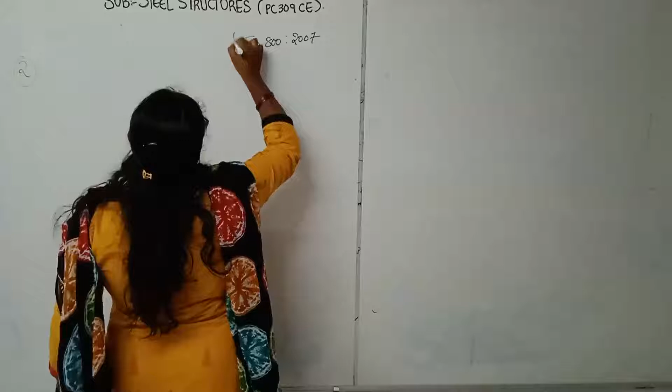Two plates, 12 mm and 20 mm thick, are to be joined by double cover butt joint to sustain a factored design load of 825 kilonewton.

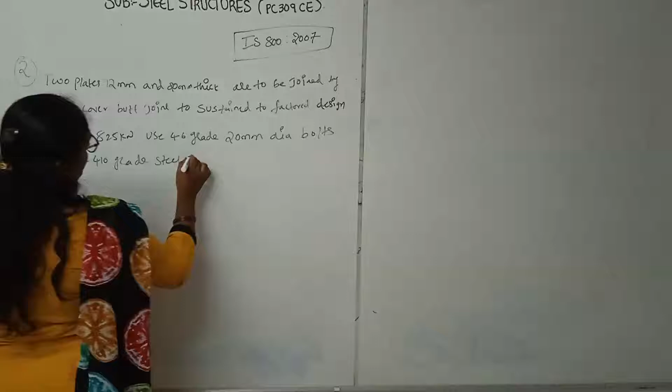Provide 8 mm thick cover plates, one on each side. Design double cover design butt joint.

So write what they have given here. What did they have given? Let's study this one.

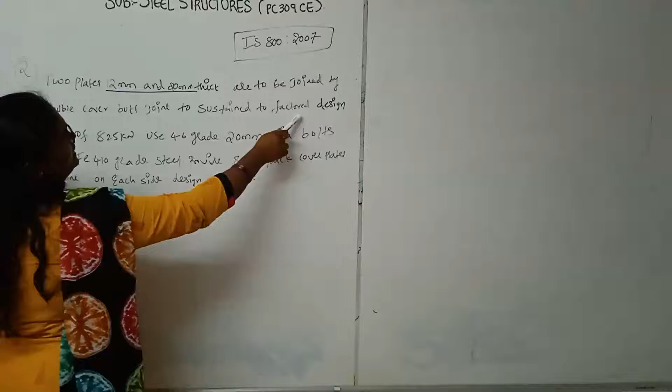Let's see here. Two plates 12 mm and 20 mm thick are to be joined by double cover butt joint to sustain a factored design load of 825 kilonewton. In the previous problem they gave a service load; here they have given the direct factored load.

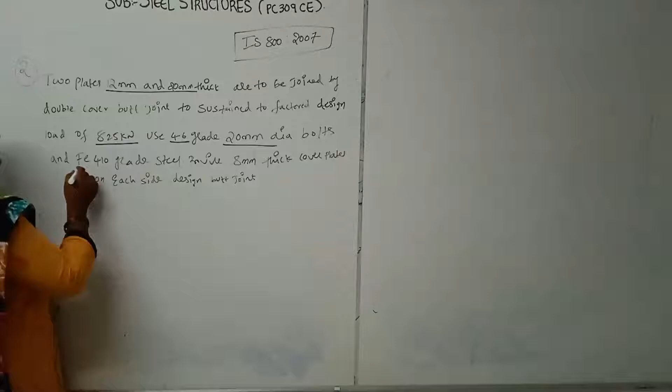This factored load has been multiplied using the factor of safety. Here they have given use 4.6 grade bolts of 20 mm dia, Fe 410 grade steel, and provide 8 mm thick cover plate.

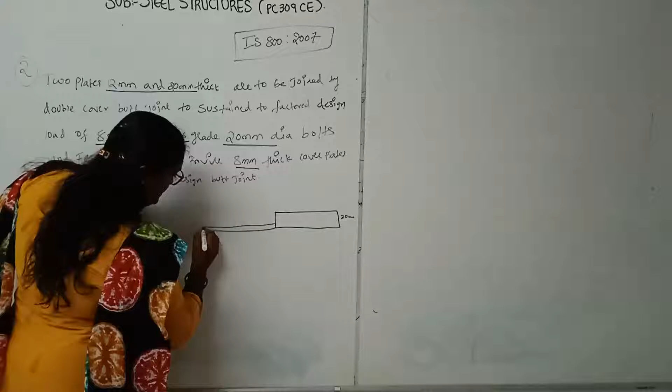So see here, this is your plate which is of how much thickness? 20 mm thick, right? Next here this is of 12 mm. This is of 12 mm.

So here what is it asking us to do? It's asking us to design the double cover butt joint.

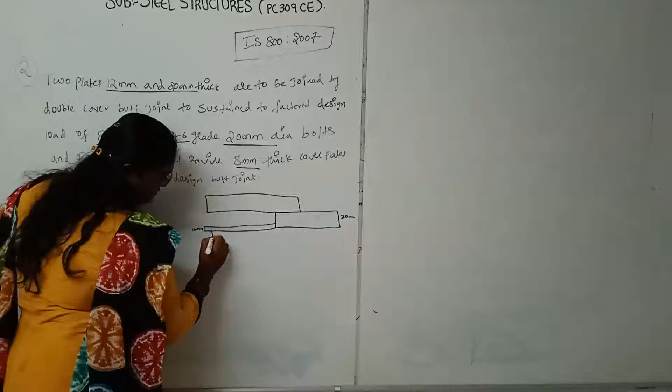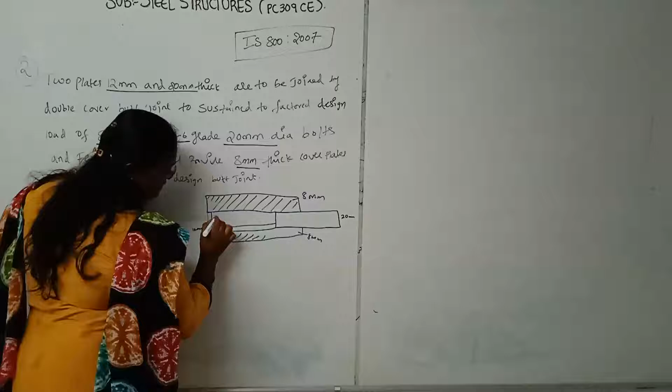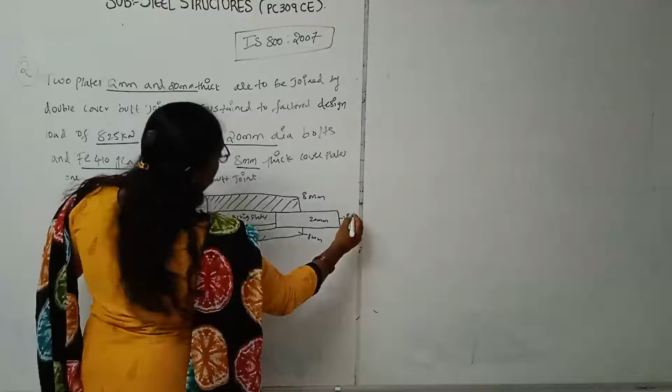This will be of 8 mm cover plates. Inside also you will be having 8 mm packing plates for covering this, right? This is 20 mm. Here you have 825 kilonewton load, right? I hope everyone understood.

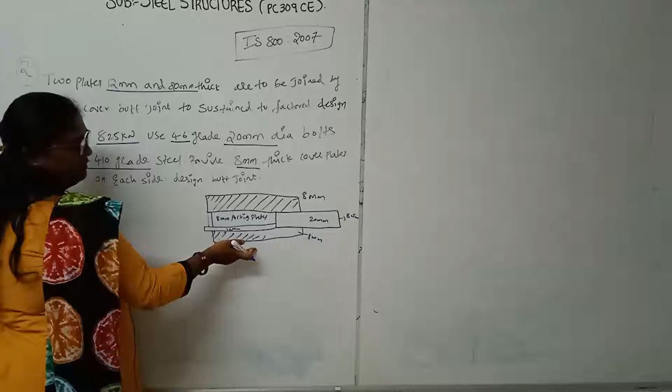This is 8 mm cover plate, this is 8 mm cover plate. Here we are using double cover butt joint, for that we have taken 8 mm cover plate on each side. Inside, for covering this, we are also using 8 mm packing plates. I hope everyone understood this.

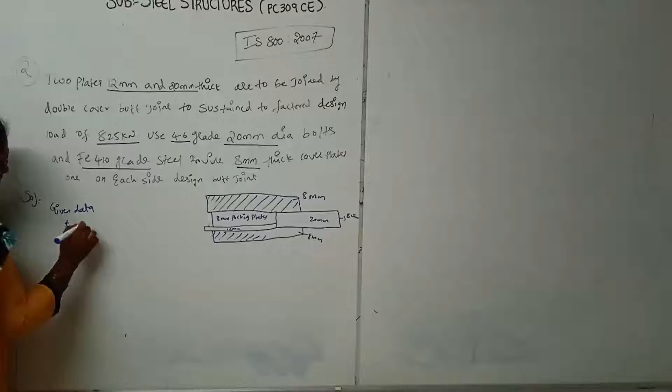So right now we'll solve the problem. What is the given data here? T1 is equal to 12 mm, T2 is equal to 20 mm thick. Here Pu is equal to 825 kilonewton, right?

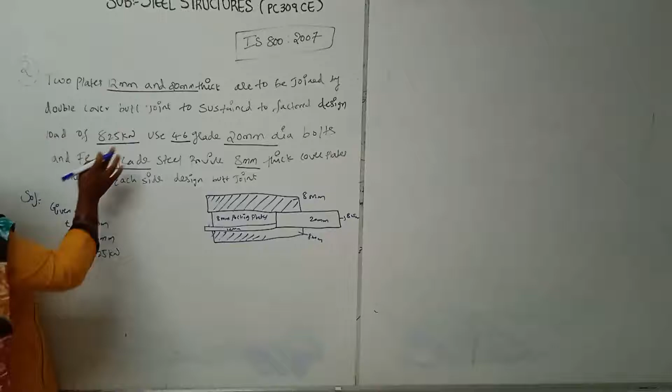Next, a joint, double cover butt joint, to sustain a factored design load of 825 kilonewton, using 4.6 grade bolts.

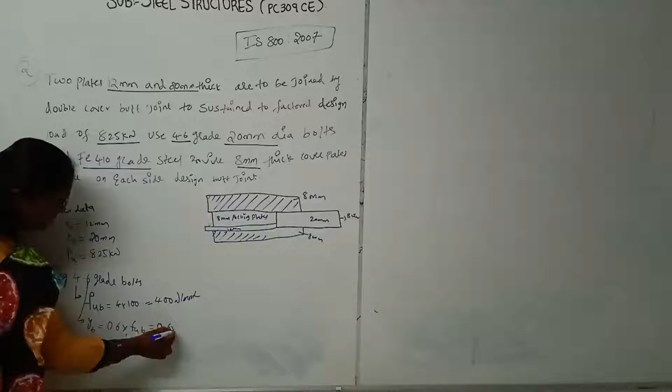So here what is your 4? That will be your ultimate tensile strength of the bolt, FUB, equal to 4 into 100. So this will be 400 Newton per mm square. And what is your 6? That is the yield stress of the bolt, equal to 0.6 into FUB. So 0.6 into 400 gives 240 Newton per mm square, right?

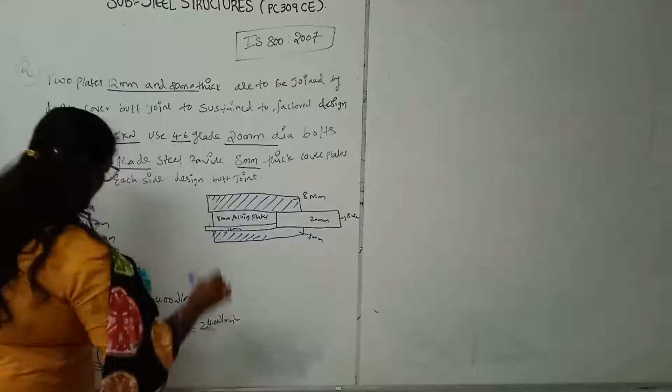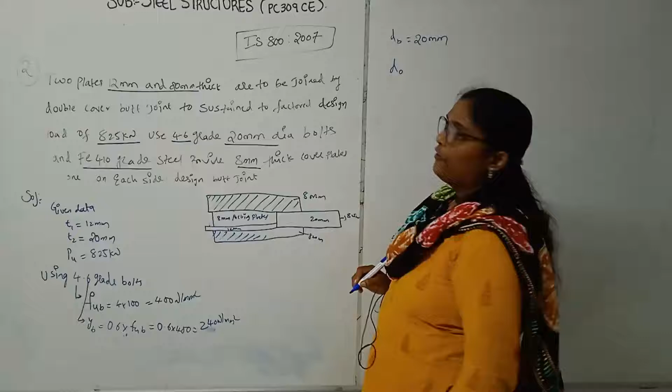Next, here what we are using, your dia of bolt is how much? Your dia of bolt is 20 mm. So what is the dia of hole? That will be dia of bolt plus clearance.

So here what is the dia of the bolt? That is 20 mm. So according to our page number 73, what is the value of clearance provided for the 20 mm bolt? That is 2 mm clearance. So that will be 20 mm plus 2 mm, 22 mm. Your D naught will be 22 mm.

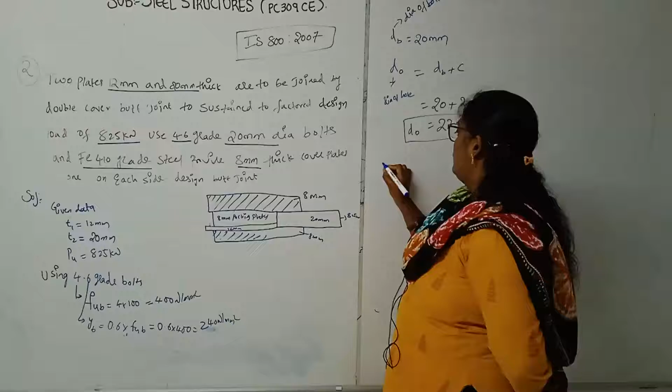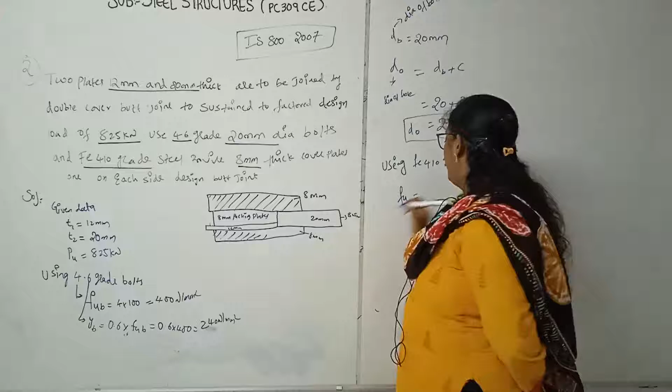So next, using Fe 410 grade steel. So what is Fe 410 grade? Here Fu, the ultimate tensile strength of the plate, is 410 Newton per mm square, and your yield stress of steel is how much? 250 Newton per mm square.

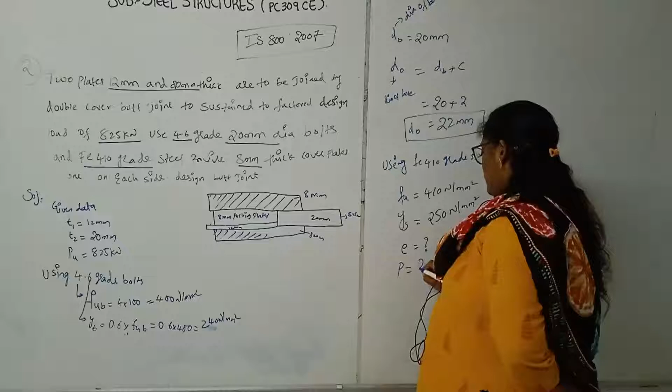Next we need to calculate here for going for the design purpose. What we have to find out? He is asking, we need to find out end distance, pitch distance. So how much? This we need to find out. Okay, we'll solve this one.

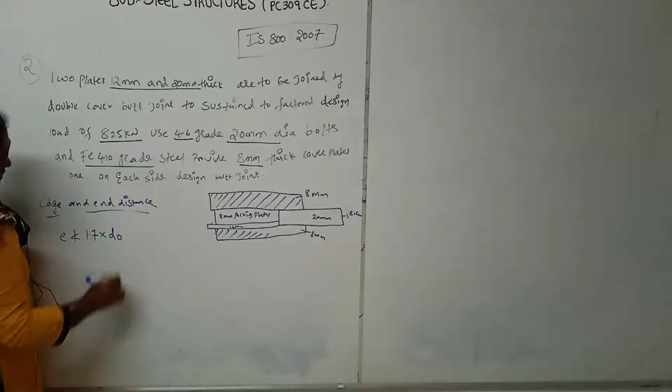So right, what will be your E? Previously we have taken this as machine cut. Now we are taking edge distance and end distance. So we have two criteria, E not less than 1.7 into D naught. Here we are assuming, in the previous problem we assumed machine cut, now I am assuming flame cut.

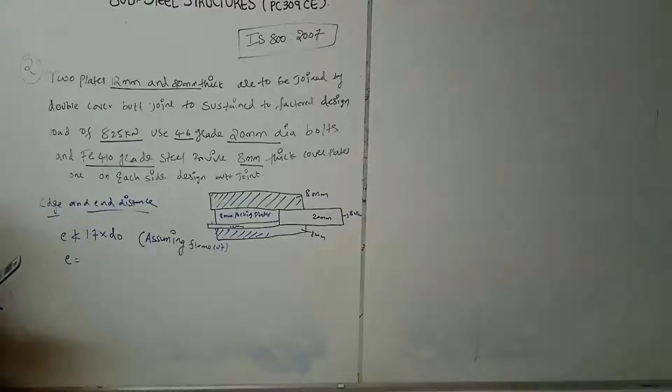So right, you have 1.5 D naught and 1.7 D naught. So here what will be the edge distance? 1.7 into D naught, that is 22, 20 plus 2 clearance. How much are you getting? 1.7 into 22 gives rise to E not less than 37.4 mm. So that can be approximately taken as 40 mm.

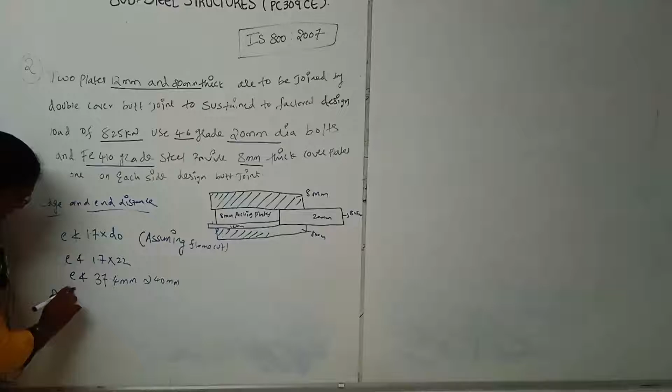Provide E is equal to 40 mm. So right, next we'll go for the pitch distance. Previously we have taken the minimum pitch distance and minimum edge distance. Now I am taking the value which can come between the minimum and maximum.

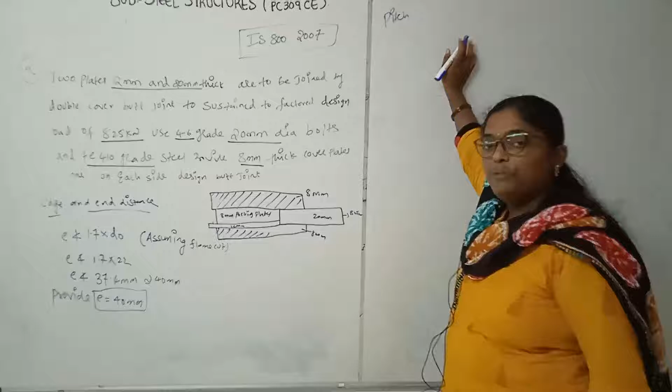Provide minimum pitch will be not less than 2.5 into dB, dia of the bolt. So P not less than 2.5 into 20. So what it will be? 2.5 into 20 gives 50. So P not less than 50 mm. This will be your minimum.

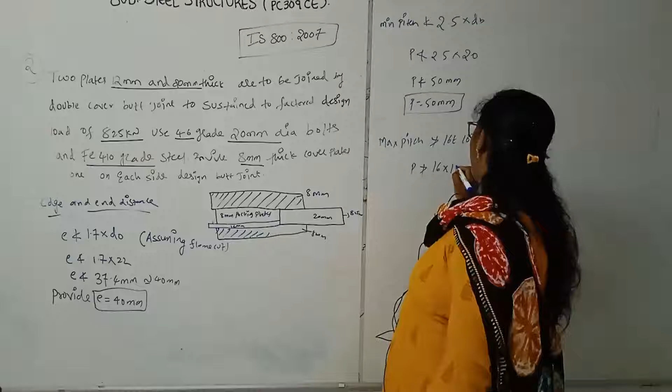So we will go for the maximum. Maximum pitch should not be greater than 16T or 200 mm. So here for P not greater than, I am taking 16 into 12, the first plate thickness. So right, P equal to 16 into 12, that is 192 mm, or 200 mm.

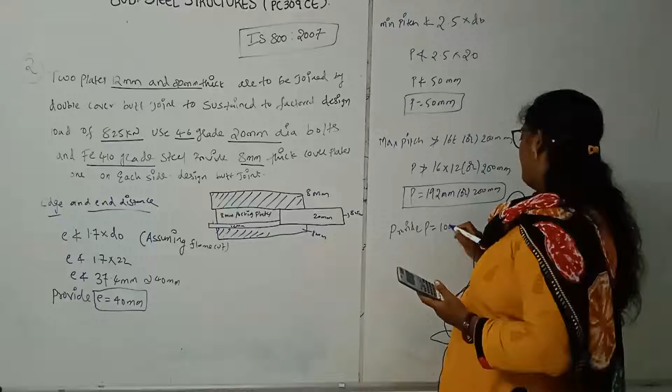So right, here provide P is equal to 100 mm center to center.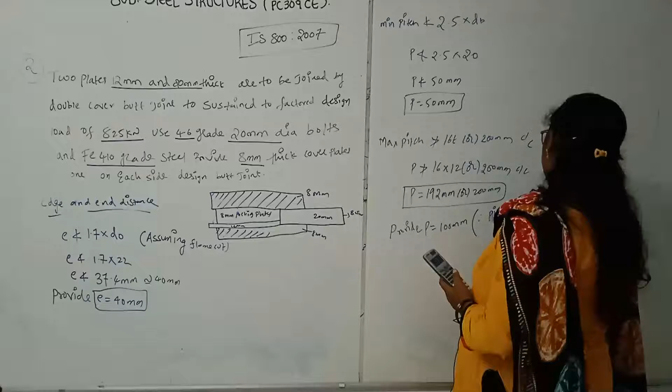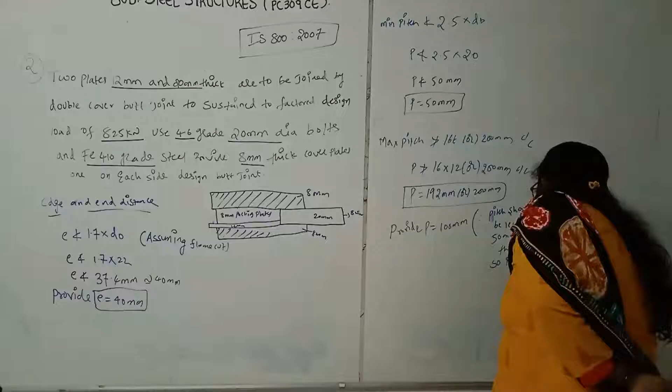Provide P equal to 100 mm. Here minimum, your pitch should not be less than 50 mm, and should not be greater than 192 mm. So provide 100 mm. Now we have got end distance and pitch distance.

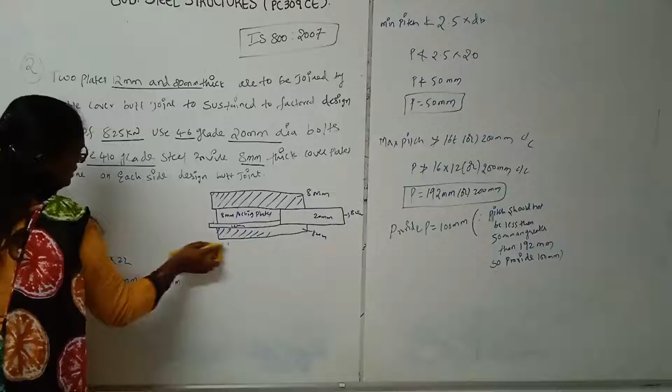Now we need to calculate the shearing and bearing. We need to design the double cover butt joint using shearing and bearing, so VDSB and VDPB. First, shear capacity of the bolt.

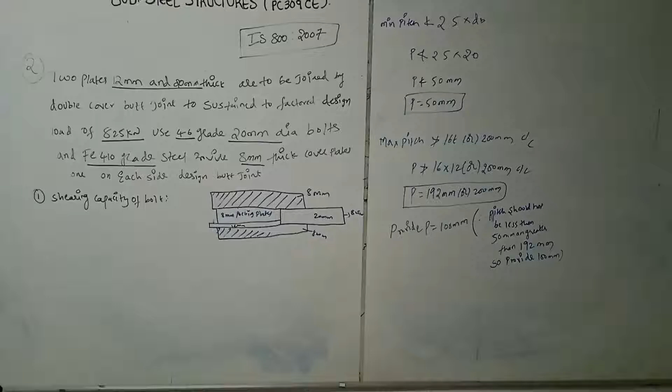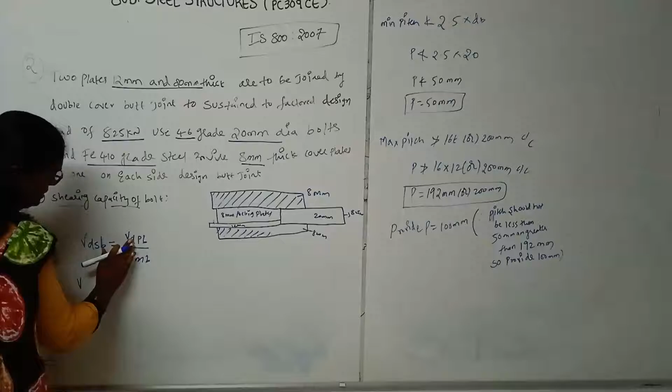Here VDSB equal to VNSB by gamma MB. So VNSB is FU by under root 3, into nn Anb plus ns Asb.

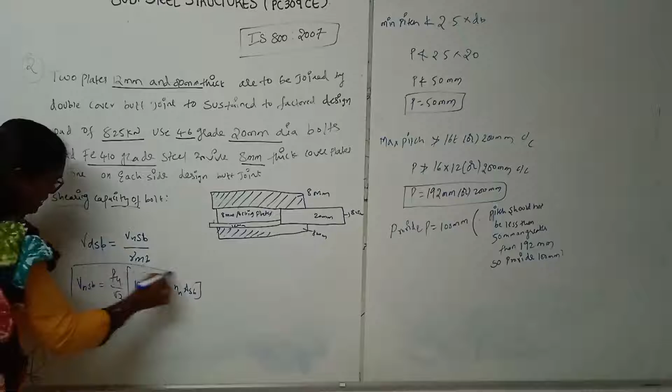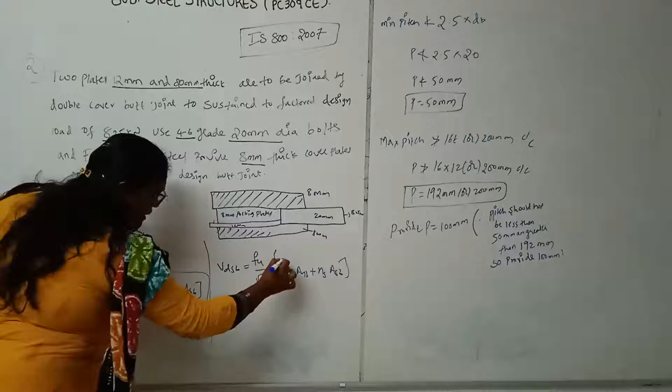So obviously your VDSB will be... Anb plus ns Asb. First we need to find out nn and ns. For the butt cover, whenever we go for the double cover butt joint, you will be getting nn and ns.

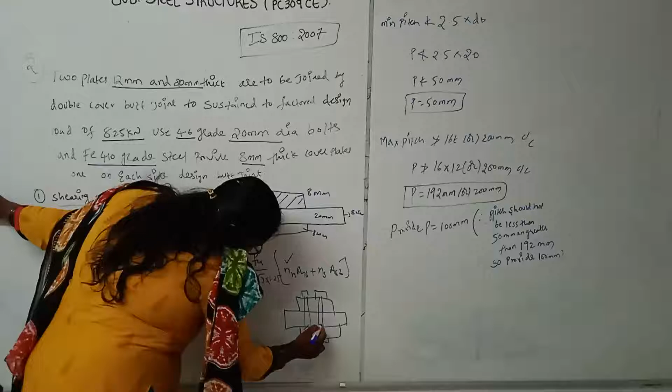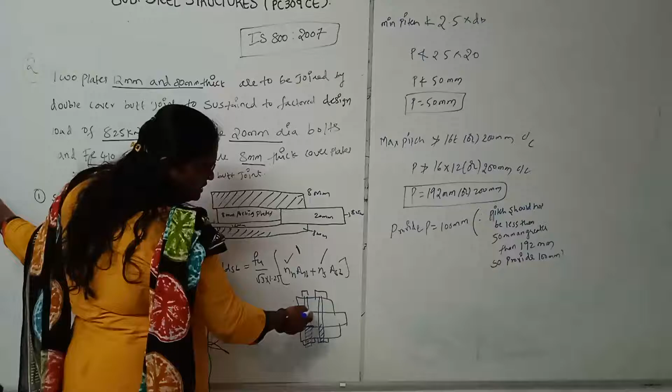What is nn? The number of shear planes at threaded portion. Here you will be having 2 shear planes — one shear plane passing through the threaded portion, so nn will be 1. Ns is number of shear planes at shank portion, which is also 1.

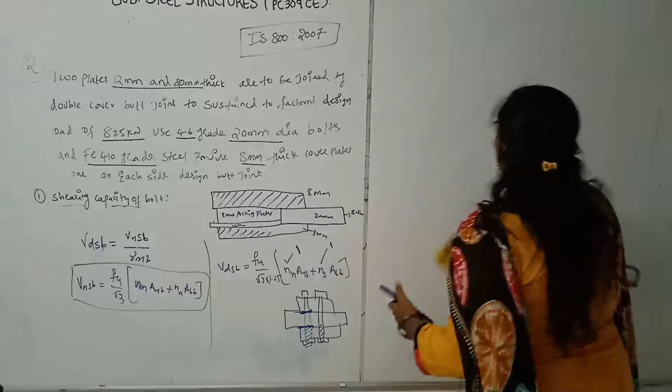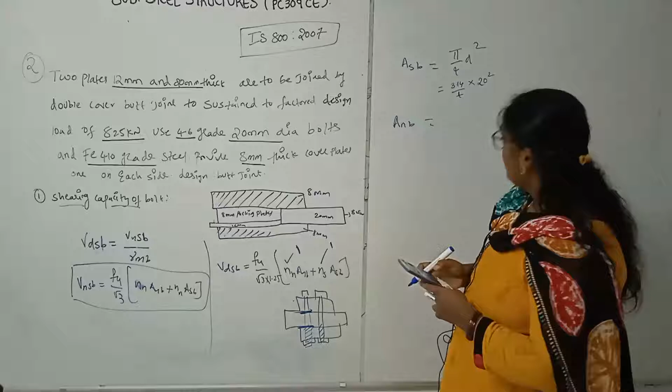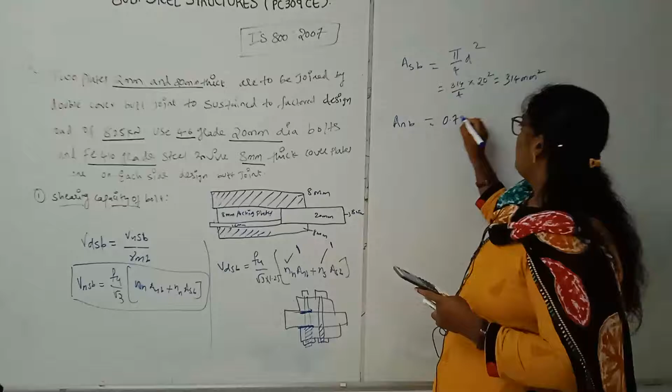So VDSB equal, first we will calculate Anb, Asb, and Anb. Asb here is pi by 4 d square, which is 3.14 by 4 into 20 square, giving 314 mm square. This is 0.78 into pi by 4 d square, or 0.78 into Asb, that will be 0.78 into 314.

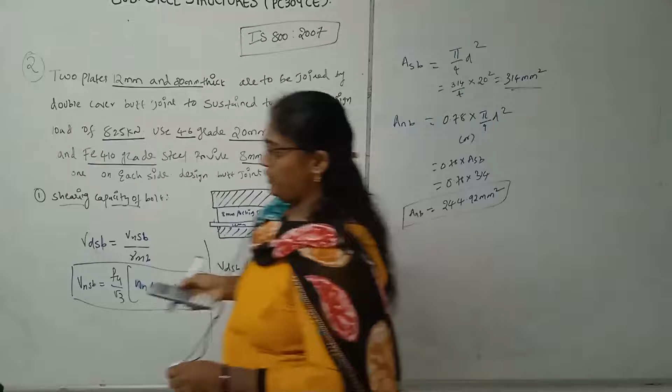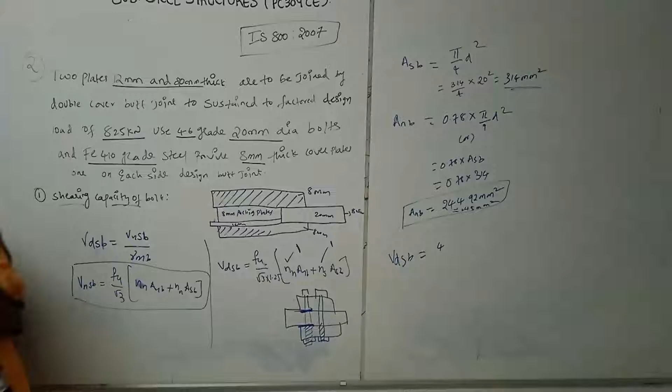We have got both the values. Next, place all the values in VDSB. You can write it approximately as 245 mm square. So VDSB is equal to FUB, since we are calculating for the bolt, so that will be 400 by under root 3 into 1.25, n is 1, nn is 1, Anb is 245 plus 1 into 314.

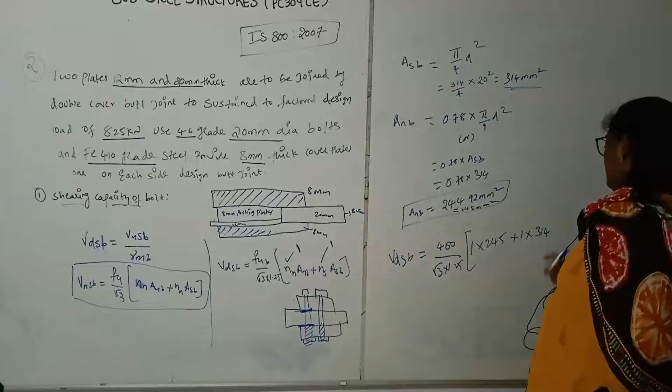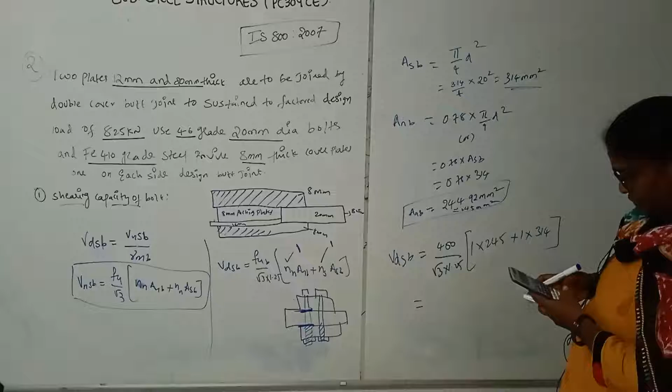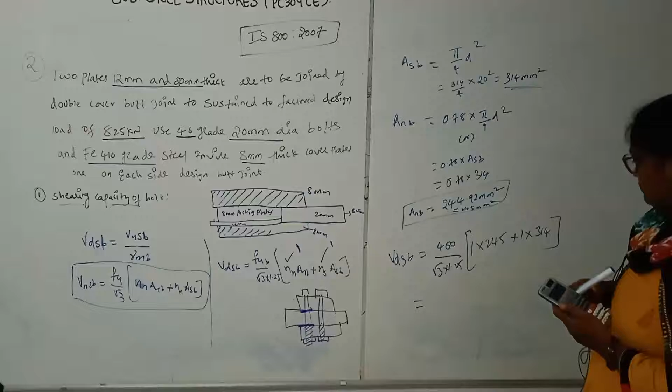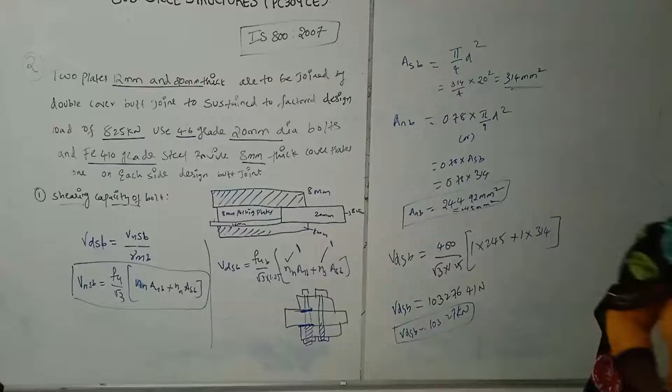That gives 400 divided by under root 3 into... so your VDSB will be 103,276.41 Newton. Every unit will get cancelled, so VDSB will be 103.27 kilonewtons. The shearing capacity of the bolt is 103.27.

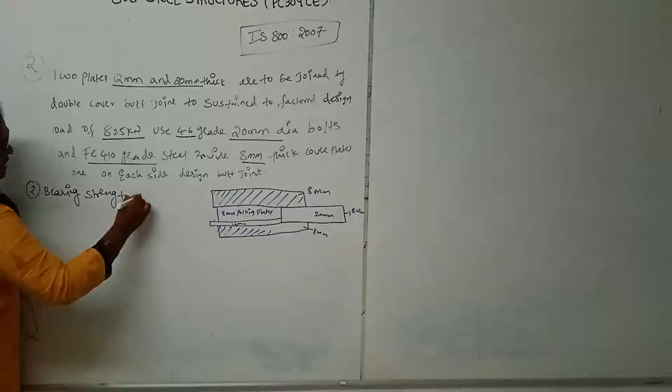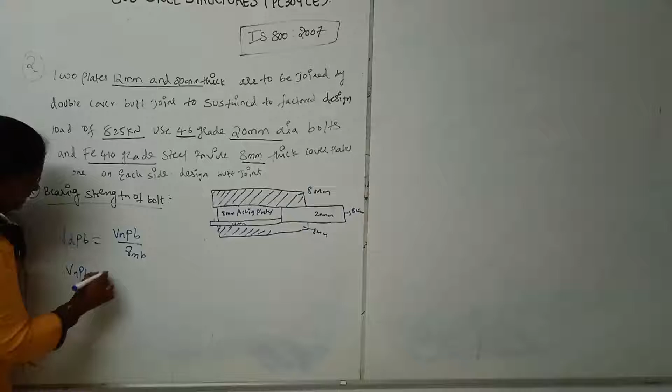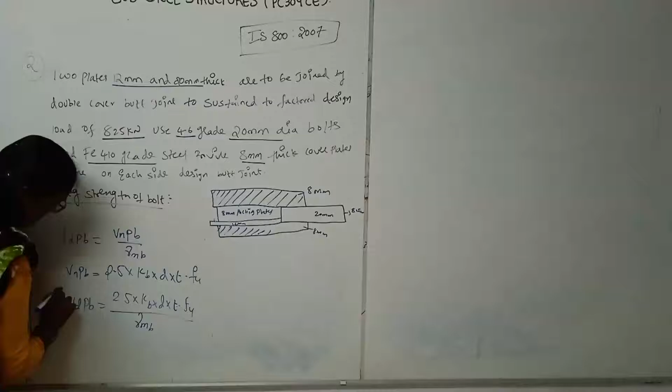Next we will calculate the bearing strength of the bolt. VDPB is equal to VNPB by gamma MB. VNPB is 2.5 KB into D into T into FU. So VDPB becomes 2.5 into KB into D into T into FU by gamma MB. Now we will solve for KB.

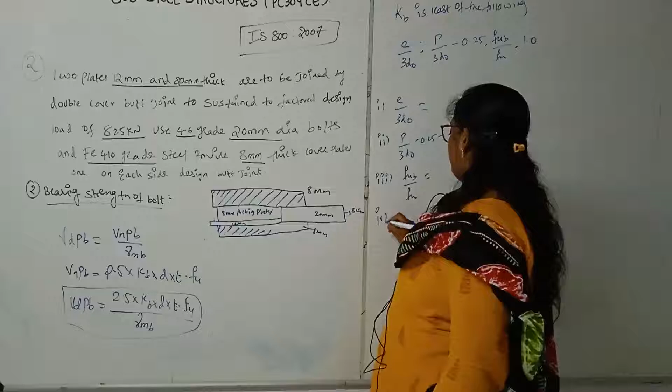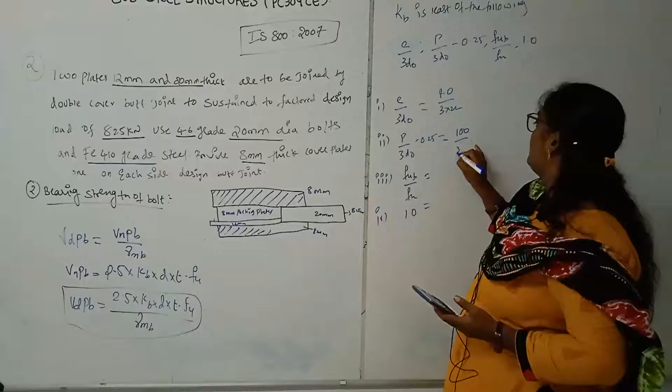KB is the least of the following: e by 3D naught, p by 3D naught minus 0.25, FUB by FU, or 1.0. We will solve p by 3D naught minus 0.25: with 40 end distance, 3 into 22, we have taken 100 by 3 into 22 minus 0.25. FUB is 400, FU is 410.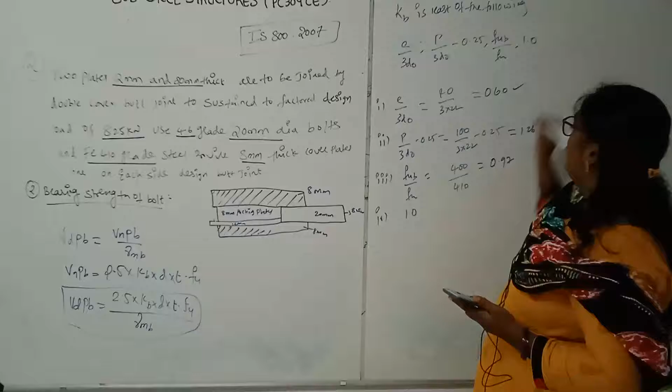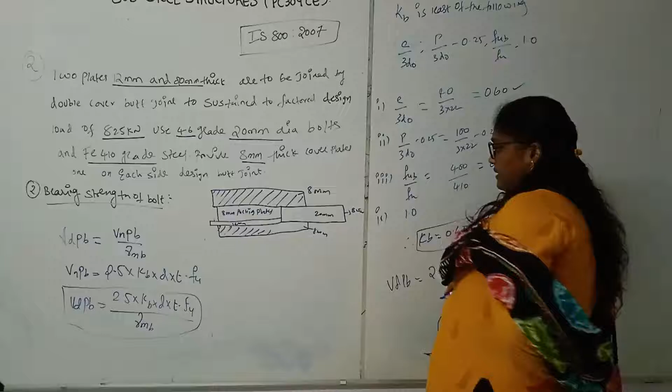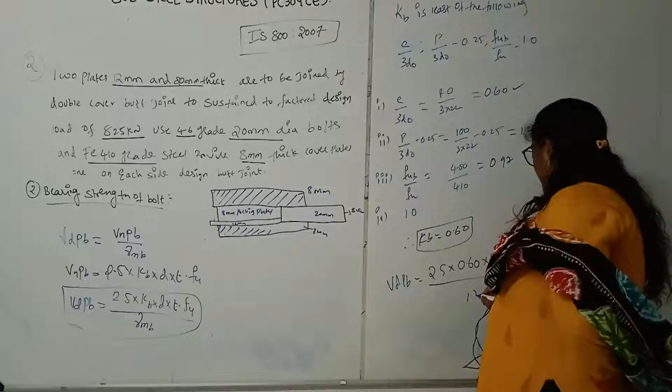So which is the least value here? Take KB as 0.60. So VDPB is equal to 2.5 into KB of 0.60, D is 20 and T is also 20 — here we are taking thickness. FU is 410, by gamma MB that is 1.25.

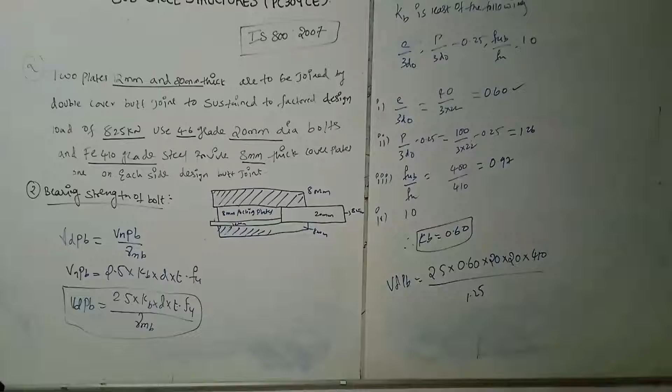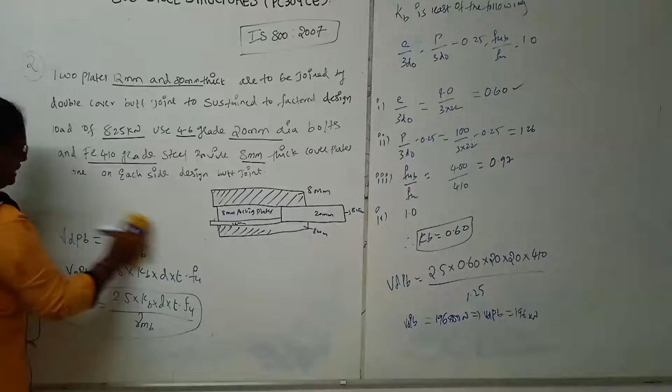Here we have got VDPB as 196,800 Newton, which gives VDPB as 196 kilonewtons. So which is the least value among the bolt values we have got? First one, VDSB is 103.27. Second one, VDPB is 196.8 kilonewtons.

So among this, which is the least value? This is the least value. So here the bolt value will be... the number of bolts will be equal to given load PU by bolt value.

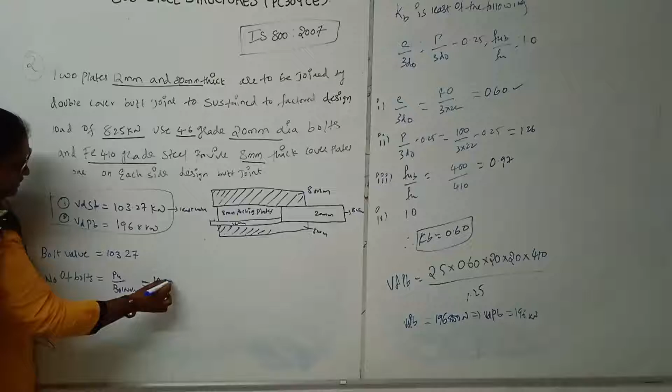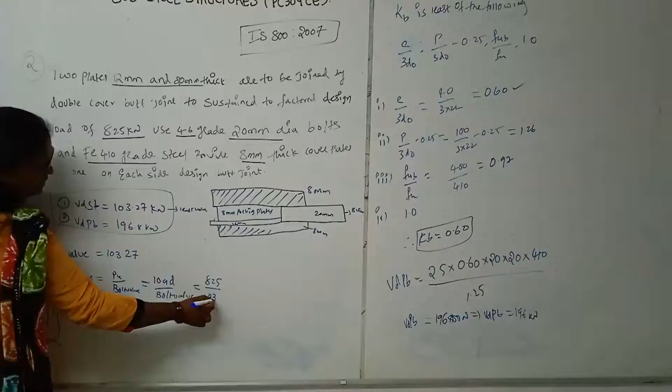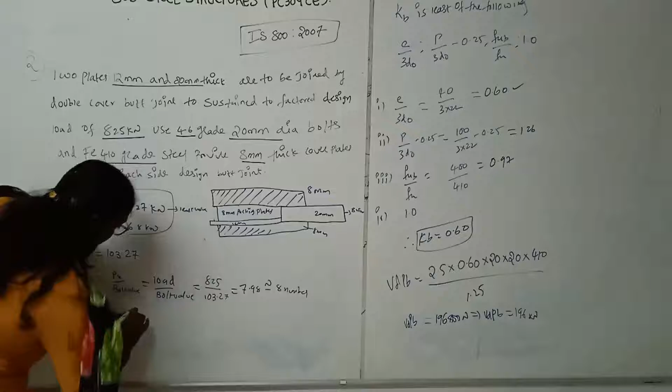What is PU? Load by bolt value. Your load was 825 kilonewtons by 103.27. So 825 by 103.27 gives 7.98, which we can approximately take as 8 numbers. So number of bolts is equal to 8 bolts.

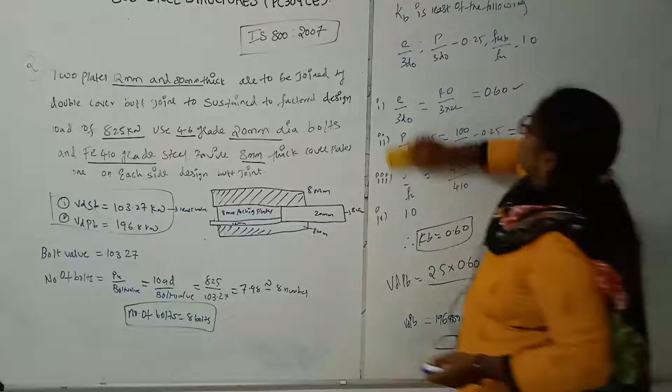So right, provide — we have designed everything for the single chain bolting. Provide single chain.

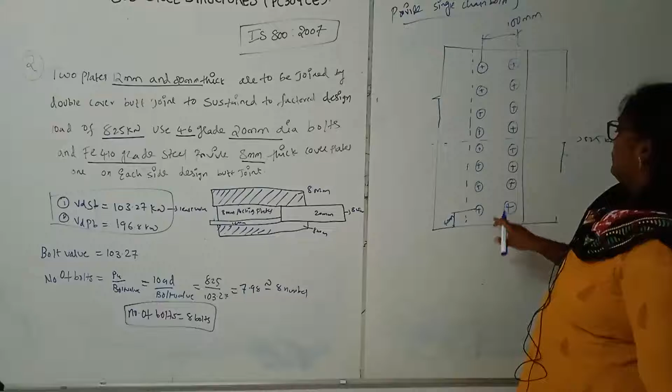Here the edge distance is 40 mm, load is 825 kilonewton. Pitch distance is 100 mm. We have provided 8 bolts in each row. Provide the single chain bolting. In this way, we have designed the double cover butt joint.